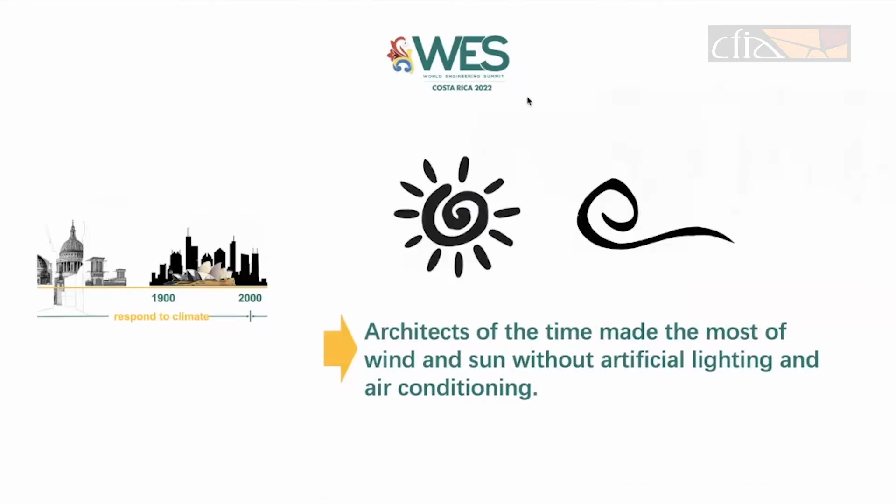Before the 20th century, the structure, shape, depth of floor plan, and even decoration of buildings were actively responding to climate to keep warm, cool, and light. Architects of the time made the most of wind and sun without artificial lighting and air conditioning. For example, Chinese courtyards can provide shade, cooling, and daylighting. These courtyards are also shaped differently from North China to the south to accommodate different sun altitude angles.

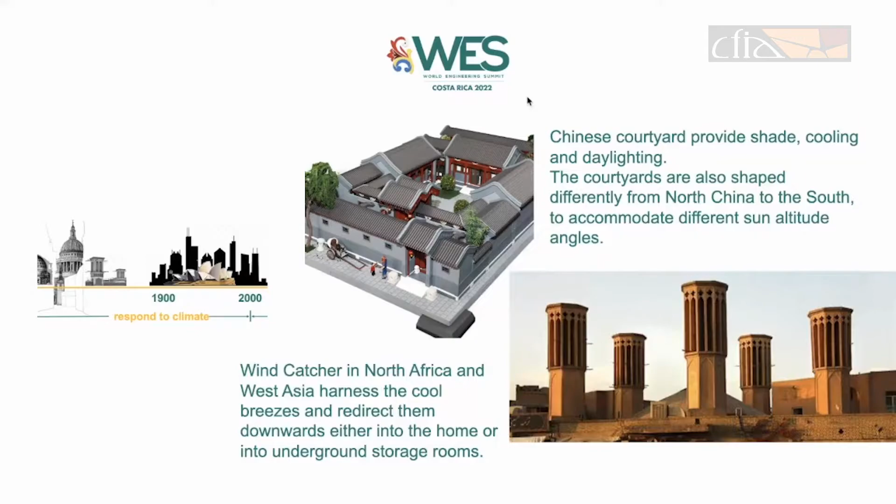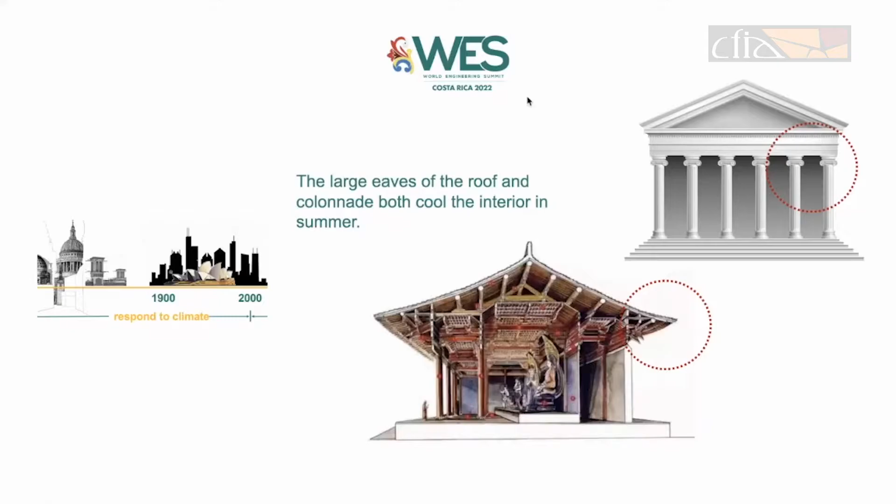Wind catchers in North Africa and West Asia harness the cool breezes and redirect them downwards into the home or underground rooms. Large eaves of the roof and colonnade both can cool the interior in summer. Pantheon in Rome only set a circular window in the center of the dome, but it can direct natural light to the floor. These climate-responsive designs also contribute to the diversity of architectural cultures, while providing comfortable living spaces.

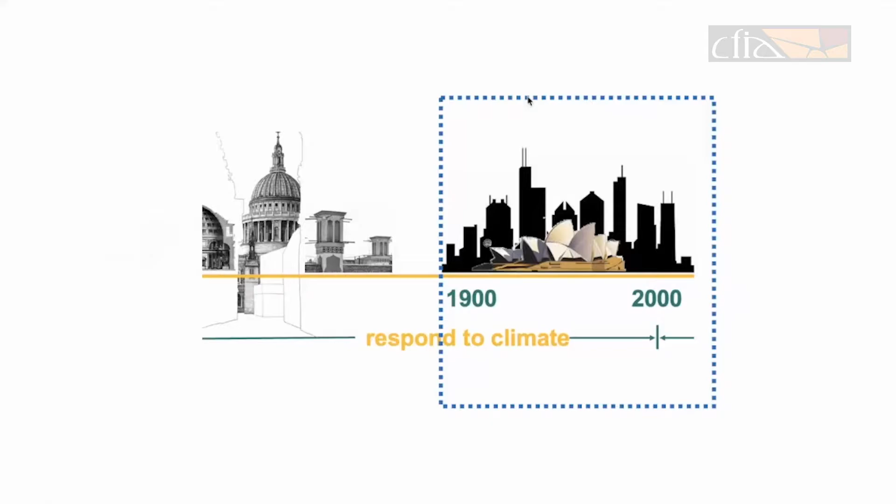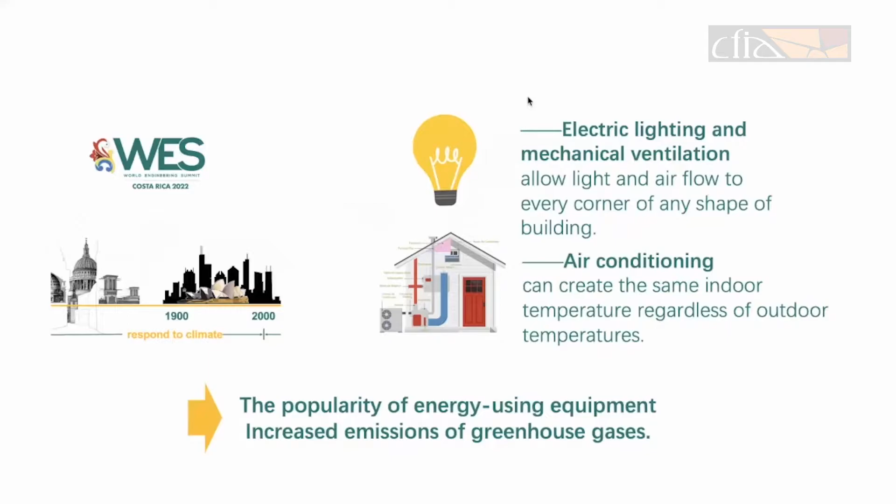And since the 20th century, with the using of concrete, lighting, air conditioning, building design can no longer be constrained by climate. Electric lighting and mechanical ventilation allow light and air flow to every corner of any shape of building. Air conditioning can create the same indoor temperature, regardless of different outdoor temperatures. The use of these energy-using devices leads to direct and indirect carbon emissions.

At the same time, reinforced concrete structures have greatly improved the power of construction. Its construction speed and height are far more than masonry structure and wood structure. Landmarks at that time were probably as tall as a modest office building today. The production of cement and steel used to make reinforced concrete emits large amounts of carbon dioxide. Cement, in particular, produces carbon dioxide from fuel burning and chemical reactions.

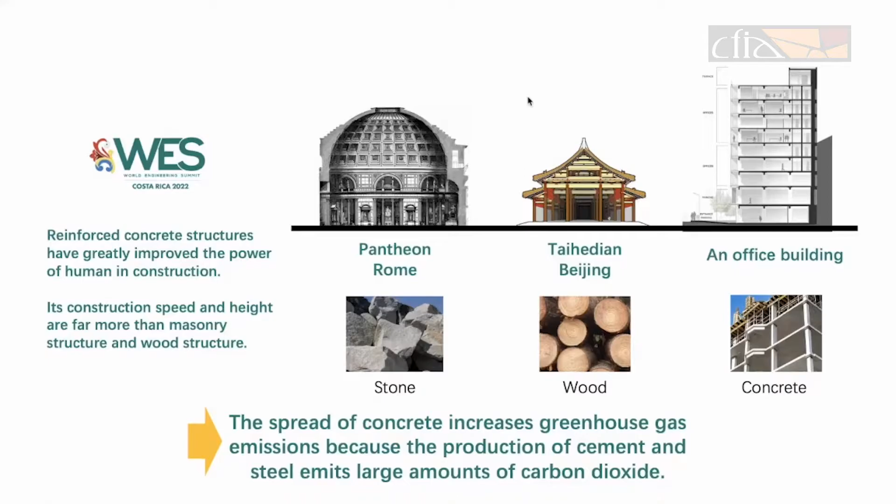Technological progress also leads to cultural convergence. Today, some new urban areas around the world seem to look the same. However, the old parts of the cities have a great diversity of architectural culture. Technological breakthroughs are like a coin with two sides. With population growth and urbanization, the 20th century saw the largest number of buildings built in history.

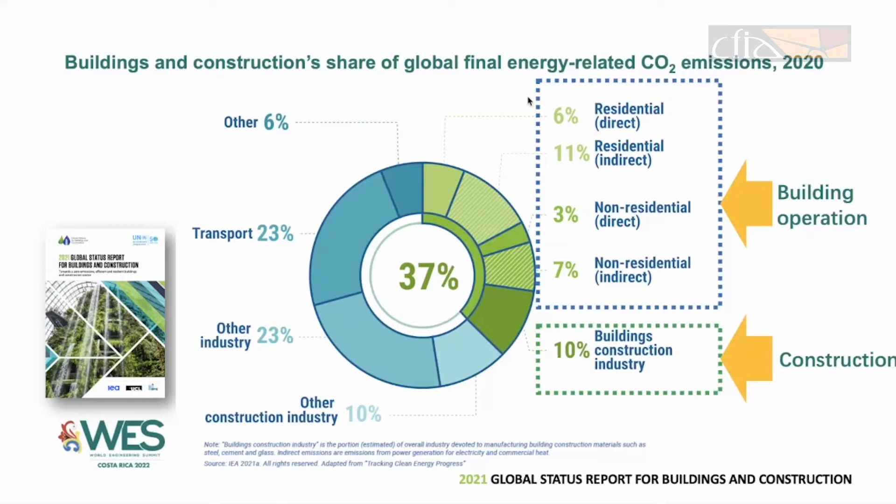Building industry in the century consumes the largest amount of non-renewable resources, emits the largest amount of greenhouse gases, and makes the most important contribution to global climate change. In 2020, building sector accounted for about 37% of global carbon emissions. Building operation accounted for about 27%, including direct and indirect emissions from lighting, heating, and cooling. Construction emissions accounted for about 10%, mainly from embodied carbon emissions, that is, emissions from the production of building materials such as cement, steel, and glass.

The increase in greenhouse gases causes global warming. According to the new IPCC report, global warming of 1.5 degrees Celsius and 2 degrees Celsius will be exceeded during the 21st century unless deep reductions in carbon dioxide and other greenhouse gas emissions occur in the coming decades. That means more buildings will be exposed to long summers and even heat waves. Research shows that by 2050, 1.6 billion urban dwellers around the world will be regularly exposed to extreme high temperature.

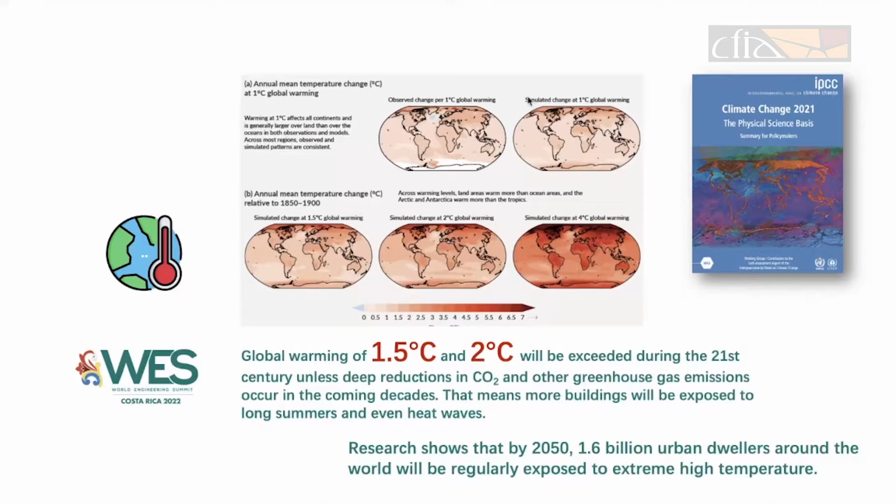Rising temperatures will put pressure on the building and its occupants. At a high temperature, construction workers may not be able to work outdoors due to fatigue and illness. And rising temperatures will decrease heating demand and increase cooling demand for buildings and affect outdoor thermal comfort.

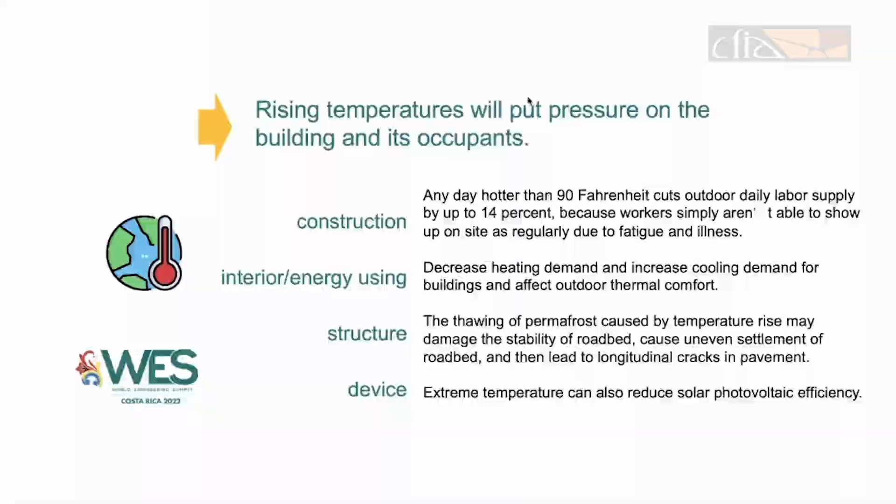And the thawing of permafrost caused by temperature rise may damage the stability of the roadbed and cause uneven settlement of the roadbed. And extreme temperature can also reduce the efficiency of solar photovoltaics. And it's not just temperature.

Climate change will also increase the frequency and intensity of extreme weather events such as hurricanes, floods, droughts, and wildfires. This will increase the pressure on human survival, as well as losses of built assets. A study shows that under the global temperature rise, floods in China will become more frequent than before. And with a combination of economic and climatic factors, flood losses will be 4 to 17 times higher than in historic times.

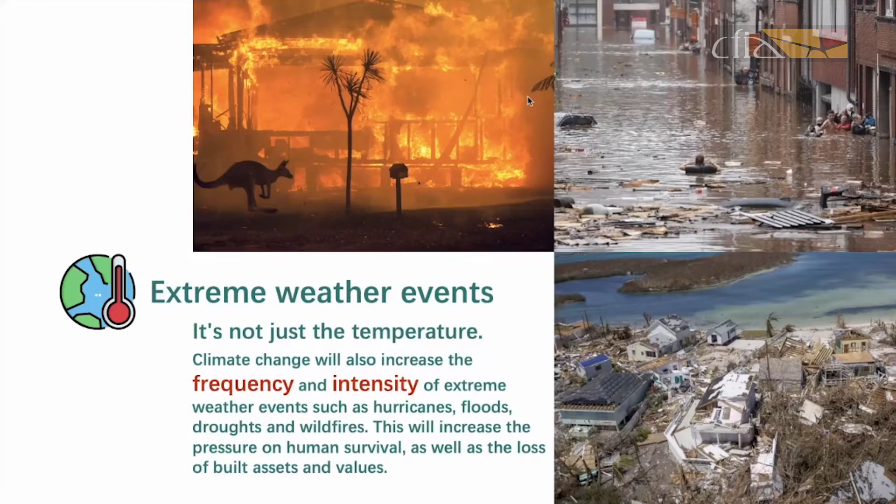And global warming will also cause sea level rise. Research shows that more than 516 cities will be vulnerable to sea level rise and coastal flooding by 2050. Rising sea level can result in inundation of buildings and infrastructures in low-lying regions.

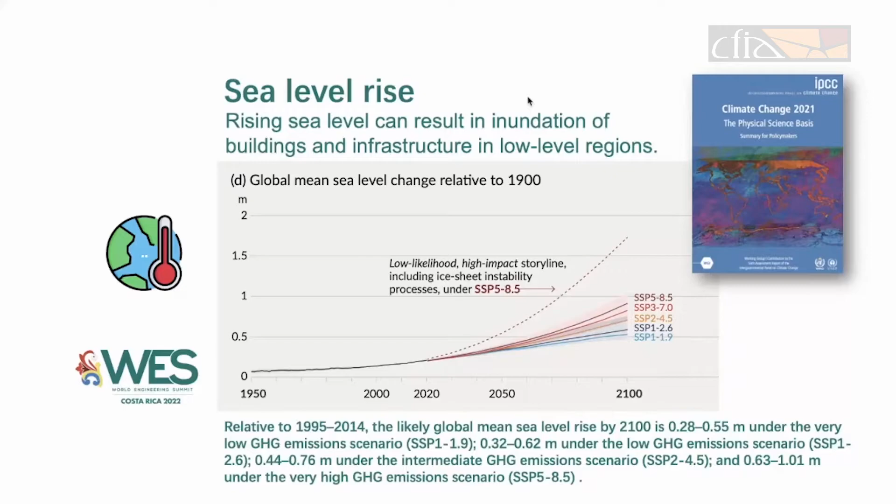And the rise of underground water level caused by sea level rise may cause the failure of anti-floating design of basements, partial structural damage, or even the whole structure floating. Buildings that can last for decades or even hundreds of years will be challenged by climate change throughout their lifetime. It can be said that building activities are both involved in and affected by climate change.

Today, building engineers face new responsibilities: how to mitigate the contribution of building activities to climate change, and how to increase the adaptive capacity of buildings to the future changing climate. This is a double challenge. Mitigation includes reducing embodied emissions and operational emissions of buildings.

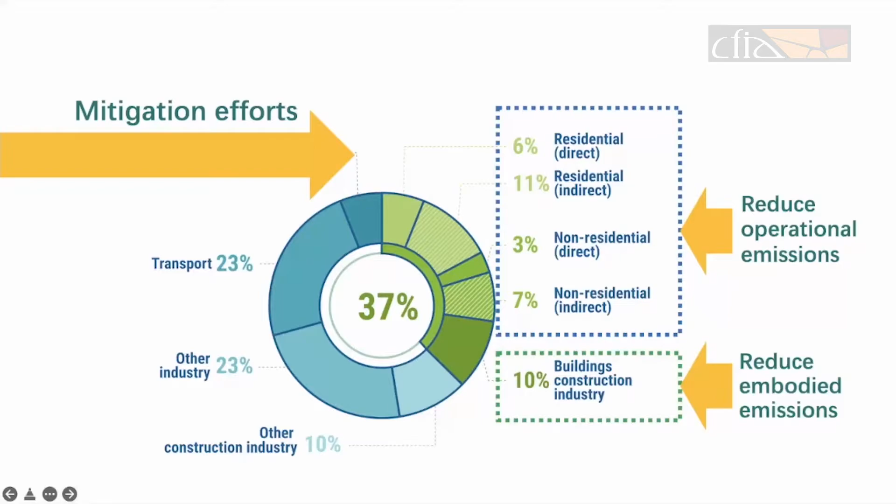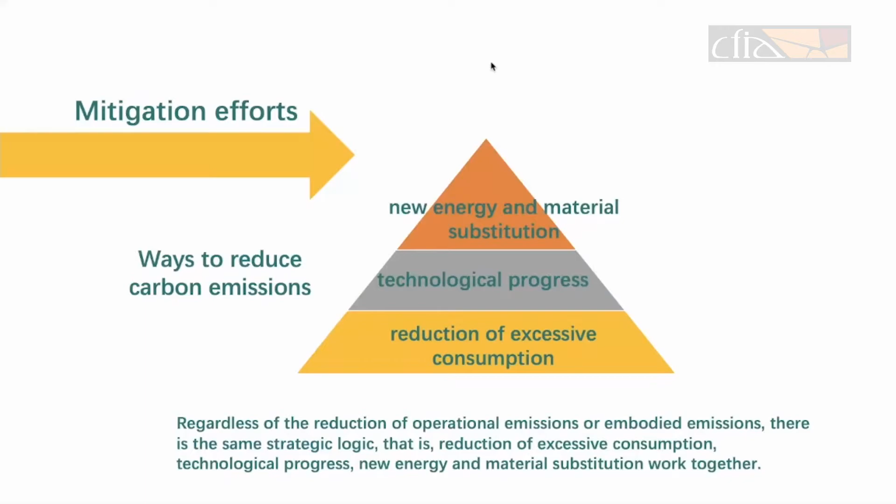Regardless of the reduction of operational emissions or embodied emissions, there is the same strategic logic, that is, reduction of excessive consumption, technological progress, and new energy and materials substitution work together. IEA outlined a series of milestones for the global building industry to achieve net zero emissions by 2050. This path is a combination of multiple strategies.

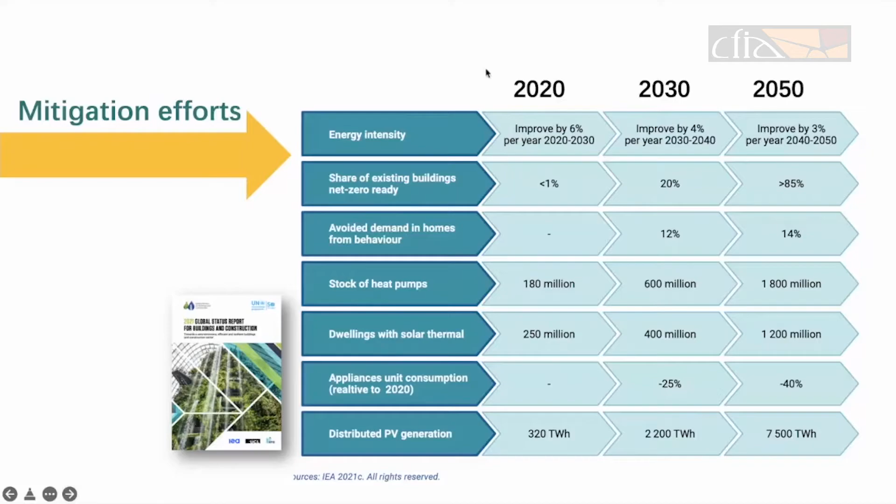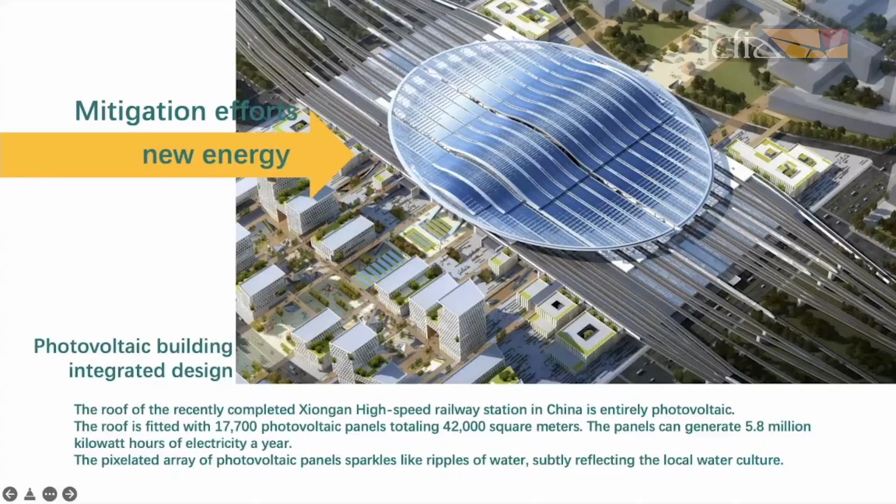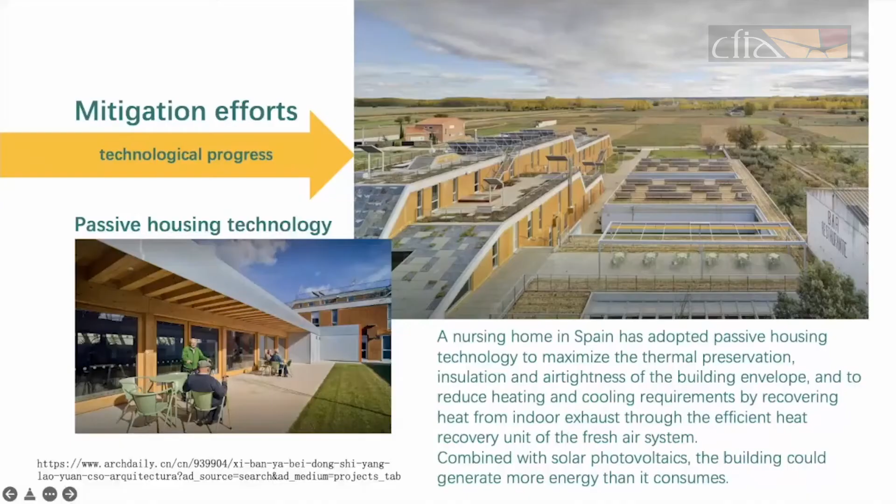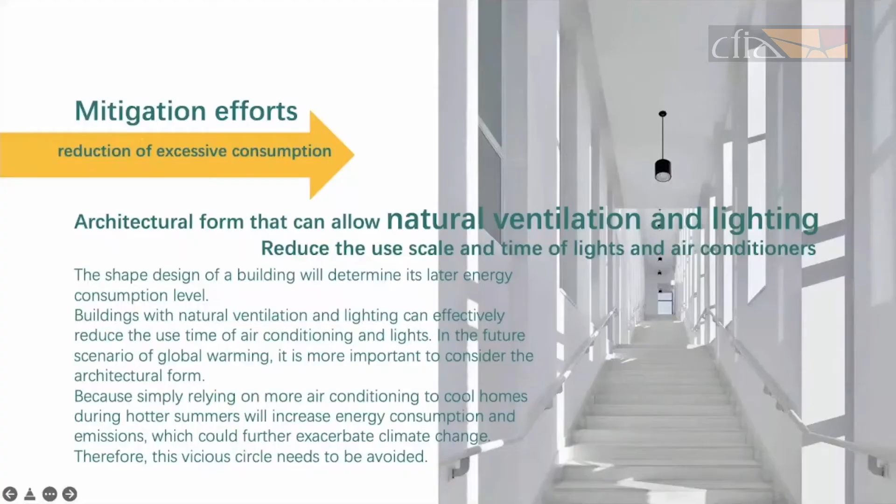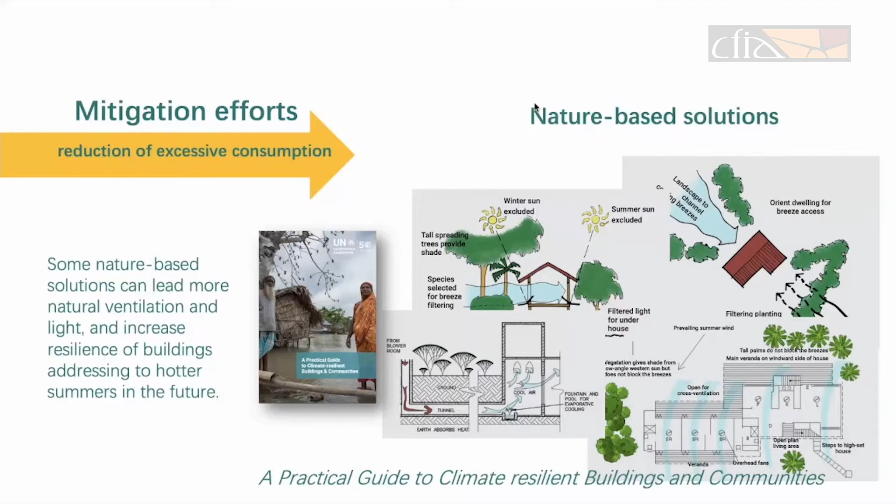Some nature-based solutions can lead to more natural ventilation and light and increase resilience of buildings, addressing hotter summers in the future. The latest UN report, A Practical Guide to Climate-Resilient Buildings and Communities, provides lots of useful strategies.

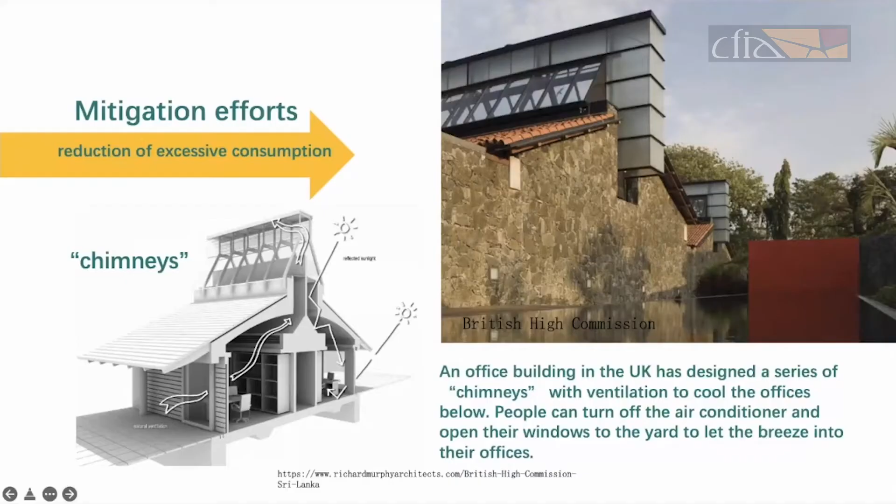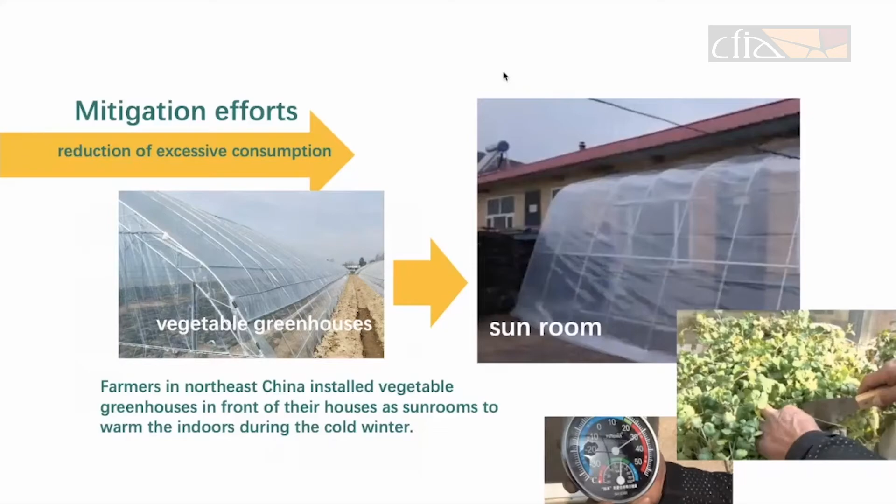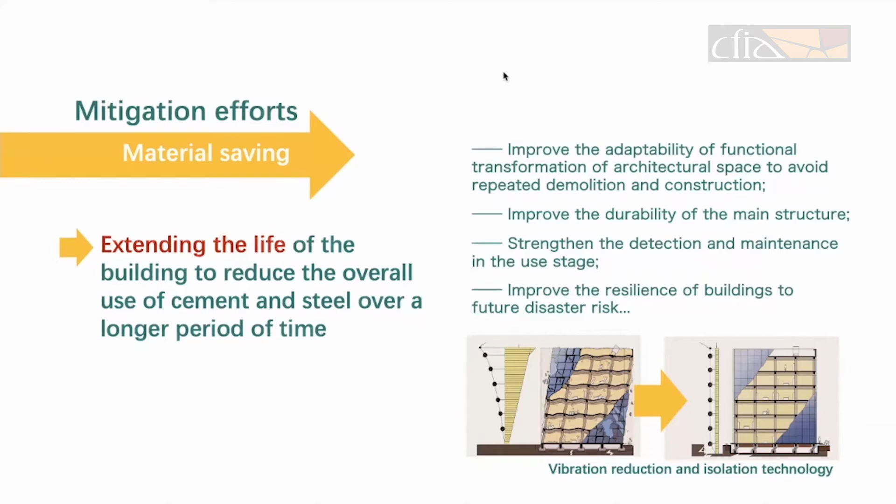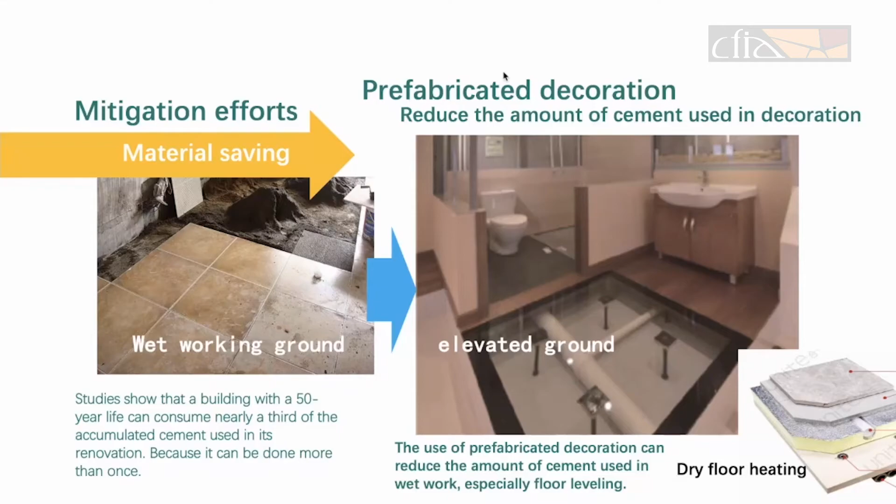The use of prefabricated decoration can reduce the amount of cement used in wet work, especially floor leveling, because studies show that the cement consumption in decoration can reach a third of that in main structures in a 50-year life building, because it can be done more than once. And the modular toilet in the prefabricated decoration can not only reduce cement consumption, but also facilitate pipeline maintenance and replacement.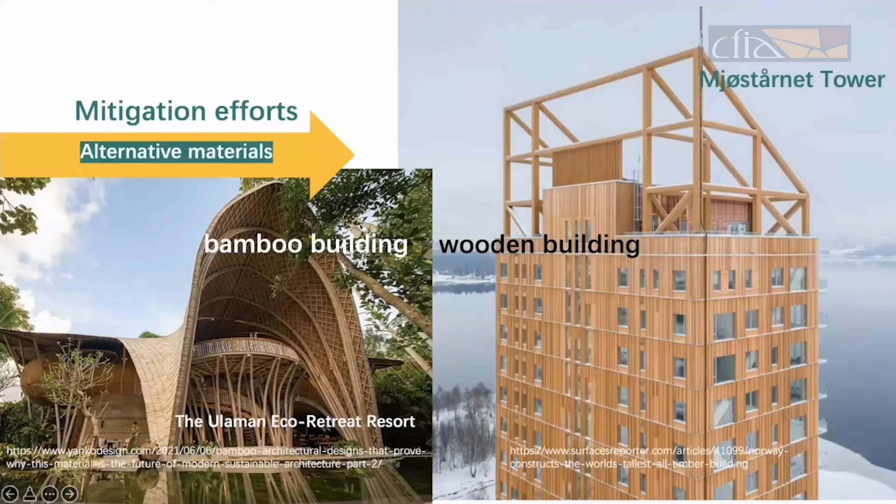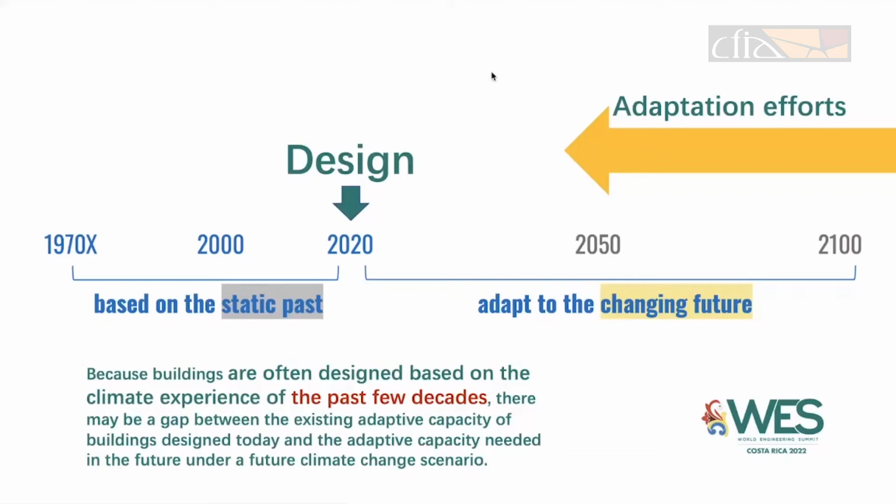Adaptation efforts are also required because buildings are often designed based on the climate experience of the past few decades. There may be a gap between the existing adaptive capacity and the required adaptive capacity in the climate change scenario. Therefore, the concept of resilience needs to be integrated into traditional design to bridge the gap between today and the future.

Building scientists and climate scientists are collaborating to develop future climate design data and corresponding climate resilience strategies. This will trigger a shift in the way of building design. For example, the 2025 version of the Canada National Building Code will consider new climate change provisions. And some cities, such as New York City, have developed design guidelines for dealing with future climate risks.

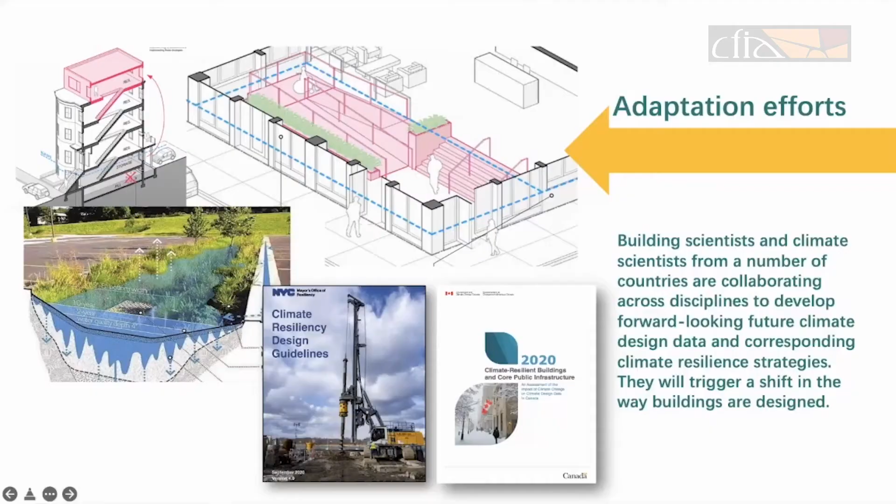Facing a changing future, engineers are exploring some creative resilience strategies. For example, a multi-purpose hall in Bangladesh is built on some pillars. The pillars can be raised by buoyancy tanks below and allow the hall to act as an emergency shelter during floods. A rehabilitation hospital in the US adopts resilience strategies such as raising the ground floor, placing the equipment on the top floor, redundant energy, and passive survival design to resist and adapt to climate change risks such as flood and sea level rise.

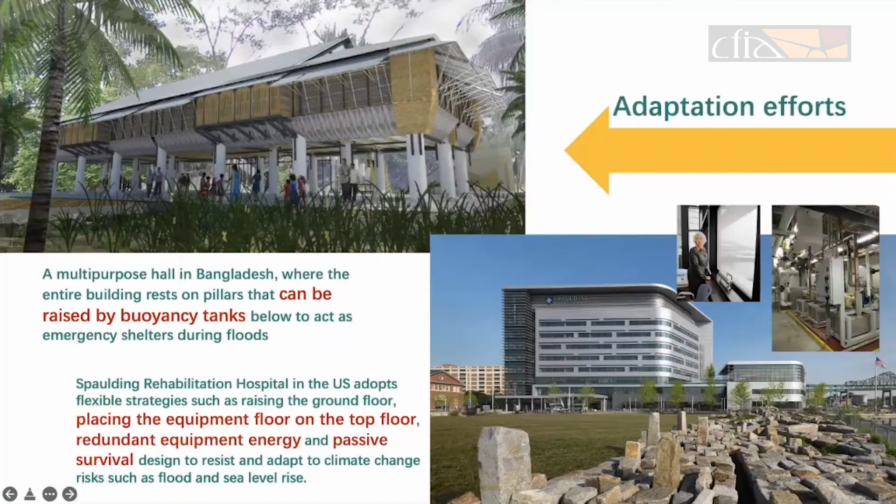In 2015, WFEO published the Code of Practice on Principles of Climate Change Adaptation for Engineers. This model code of practice provides further amplification and explanation to engineers and national engineering organizations to interpret and implement principles of climate change adaptation at a practical level. It consists of 9 principles that constitute the scope of professional practice for engineers to initiate climate change adaptation actions, particularly for civil infrastructure and buildings.

And in 2021, WFEO launched a new project, the Climate Change Mitigation Best Practice Project. It will build a database platform to collect, organize, and store successful engineering projects, plans, and ideas from WFEO national members and partners.

The changing relationship between building and climate is a cyclical process of exploration, just like the human cognitive process. The challenge of climate change will also be an opportunity for design and technological innovation in the building industry, for we can shape a more resilient future.